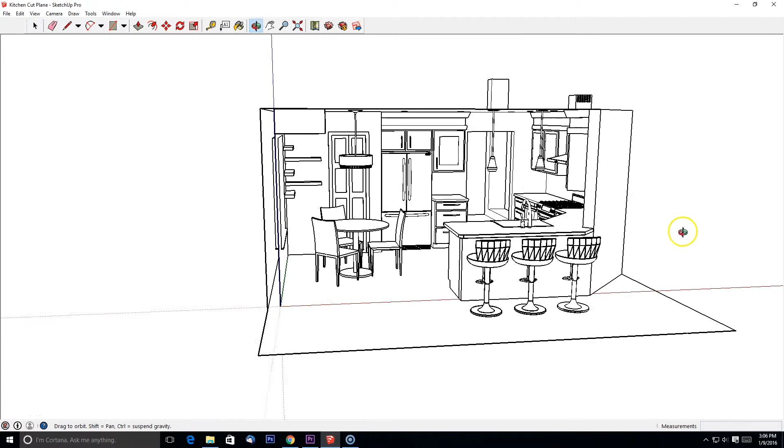In this video, we're going to look at exporting views from SketchUp. So you can see I have a kitchen already designed here. Maybe I want to put some marker on some paper and see what it looks like with some materials on it. So I'm going to start with a section plane, and I'm going to drag that all the way to the floor.

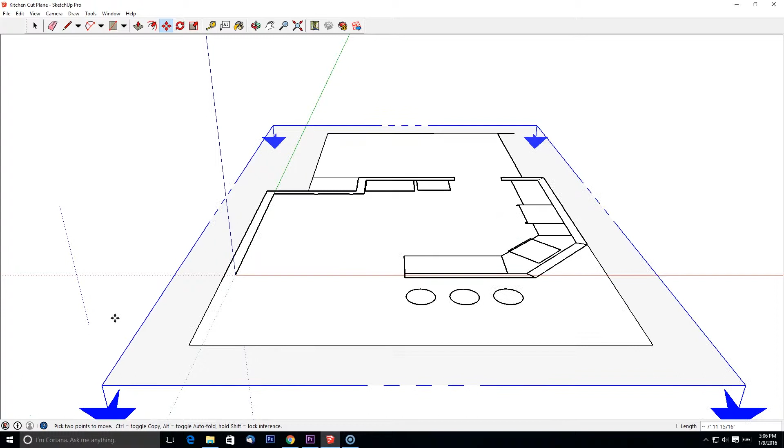Once I have it at the floor, I'm just going to go ahead and move it up again, but I'm going to type in 4.5 feet. That's a good height for your section plane because that's approximately where a floor plan is actually going to be cut above the finished floor.

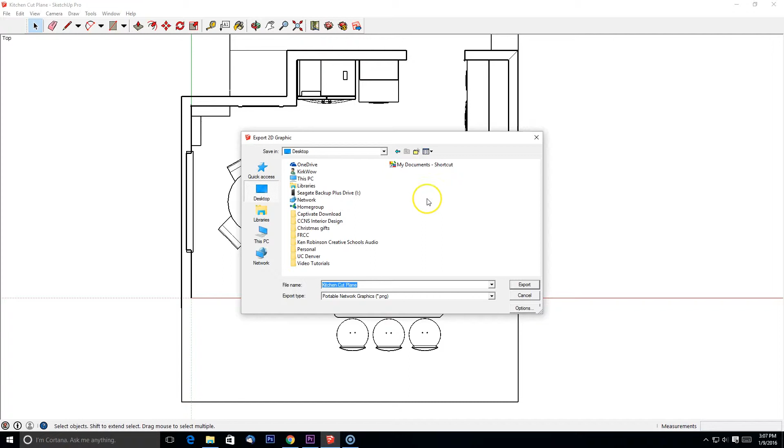So we can see I've got my floor plan here and I can see just a shave of that upper cabinet. So I probably won't render the upper cabinets into the rendering, but it's good to have it there for my reference. So when you're ready, you're going to go to File, Export, 2D Graphic, and you might make a new folder, and I'm going to call this Floor Plan 01.

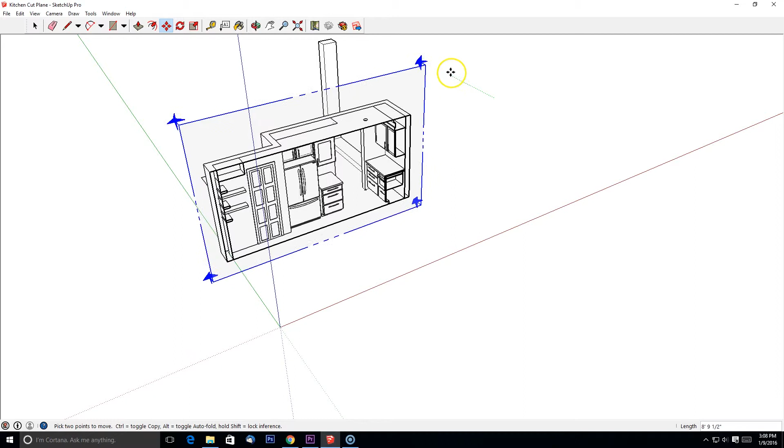Okay, so now I want to get some elevation, so I'm going to take the same section plane I had before and rotate that and get a nice section. I'm going to try it with the stove first and see if that's clean. If it's not, I might try to push that in some more.

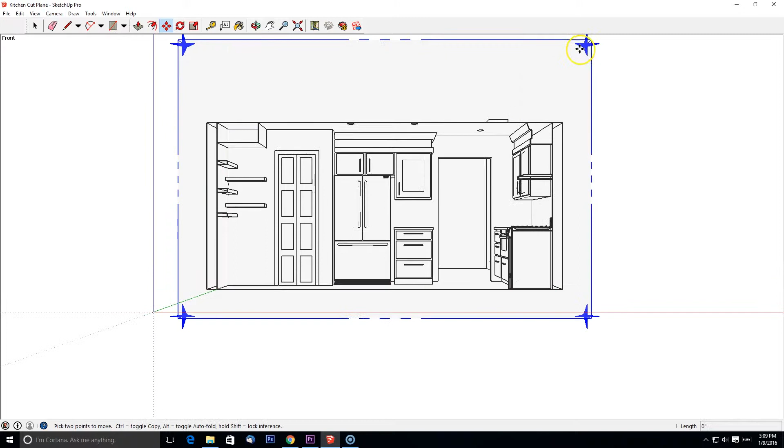Okay, so it's not bad. It's a little kind of jumbled up there towards the knobs of the stove, so it's not as clean as I'd like. So I'm actually going to push that back a little bit more. Okay, so that's pretty good. I'm going to hide my section plane again. I'm going to get that on the center of the screen, and I'm going to export that. Okay, export 2D graphic again.

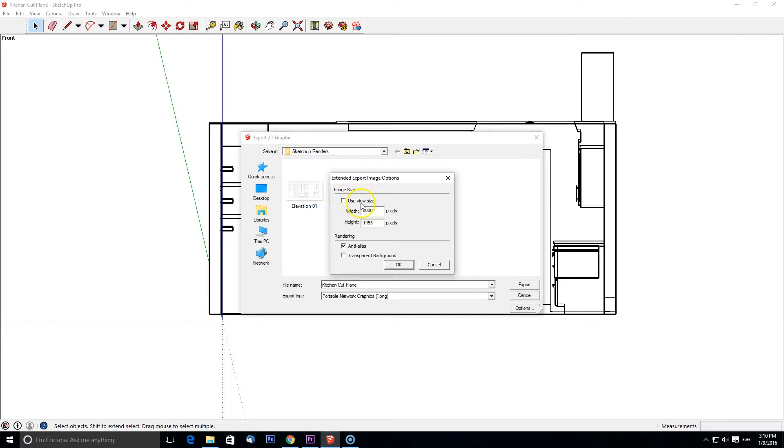Okay, so as of now, I've been using the default setting that I had set up, which is 3000 pixels. I'm going to change that to 6000 across. In case I want to use this in a rendering, I want my lines to be as good as possible on the page. That resolution is going to help that out.

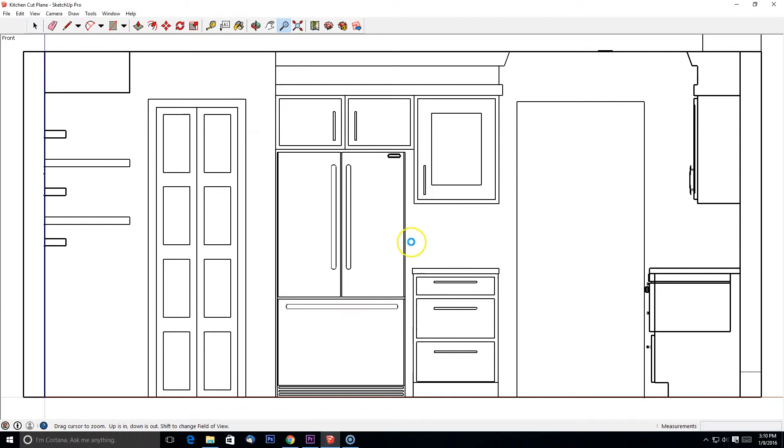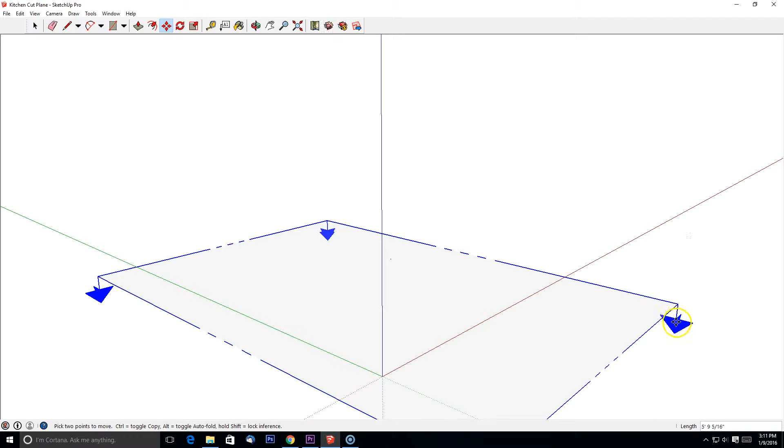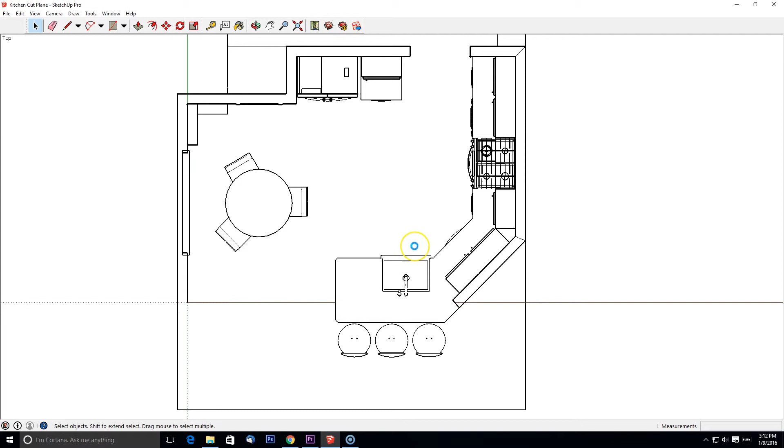Okay, so now I'm actually going to retake my floor plan at 6000 because I'm probably going to use the lines in my rendering. Okay, so now I just need one more elevation here to help tell the story of this kitchen. So I need my other section of cabinets over here.

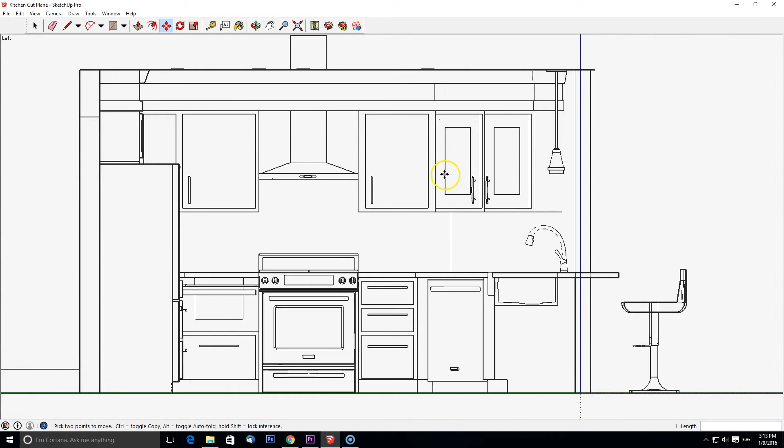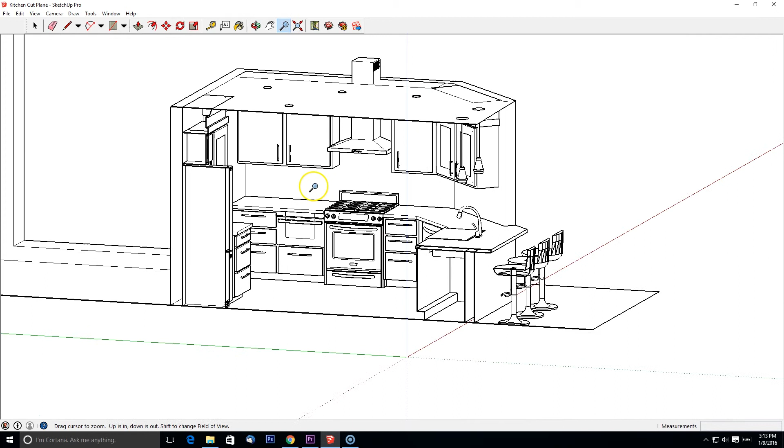Okay, so now that I have my floor plan and my elevations rendered from SketchUp with just the lines, I can print these out and put some marker on it, or I can bring it into Photoshop and experiment with some materials. This is something I usually do before I move into some materials in 3D, just to try things out before I commit to too many materials.